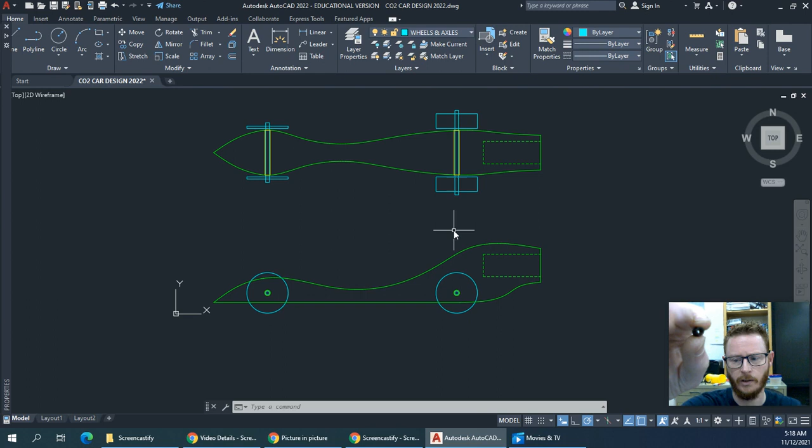I don't know how well you can see it in the camera. I'll try to get a little closer. It's just a black bushing, maybe a little blurry there, but we're going to draw a representation of this. Actually, the little straw things, these sleeves that we've drawn on here, they work well. But if you want to use these bushings, I think they work well also, and I'll explain why I think they work a little bit better. So let's draw this up.

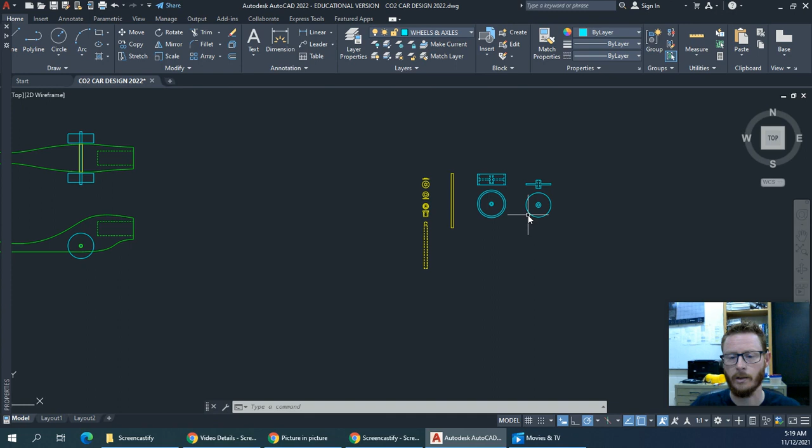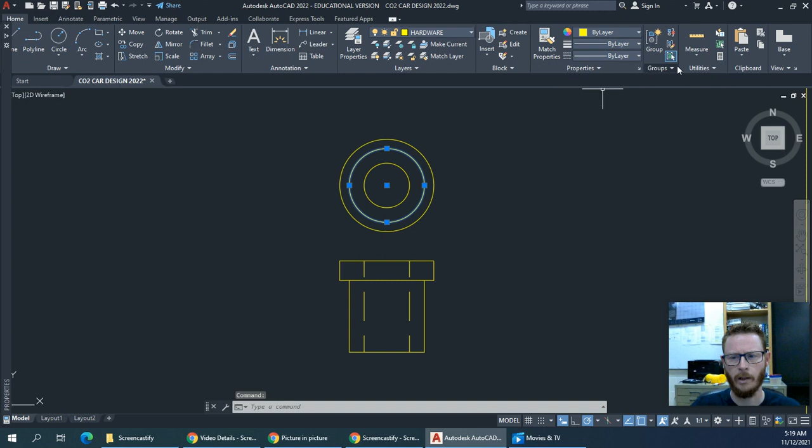And I actually took the time to kind of measure these out and get some sizes of things. So I've actually sort of pre-drawn some of this. So I'm going to walk you through how to draw this yourself. Okay. So let me zoom in. Okay, sorry, I'll fix some of my other stuff later. All right, so this is it. So I'm representing it in two different views. So a top view would be something like this, and then this would be the side view of this sort of a bushing. And I'm going to select this. So I'm going to show you how to draw this. I'm just fixing it here real quick. Okay.

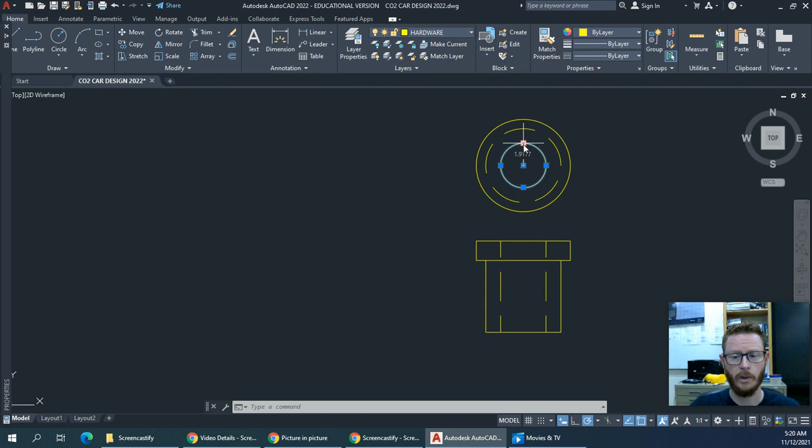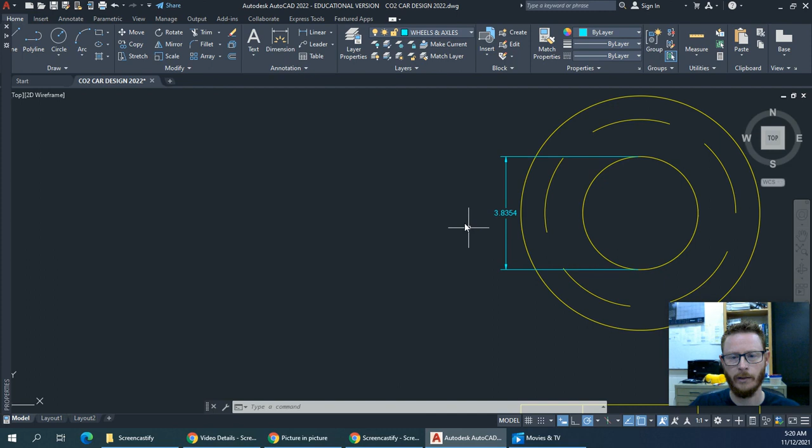Okay, so here's the sizes and how you're going to draw this. All right, so I'll probably have to check sizes as I go along here. So this is the hole that goes all the way through this thing. So we'll start here with this circle. It's going to be 1.9177. Okay, so C for circle, space bar, and I'll just click here to start this. 1.9. I've already forgotten what I just said. So I probably better give myself some help here. All right. So you do not have to draw that. That is to help me remember what size things are.

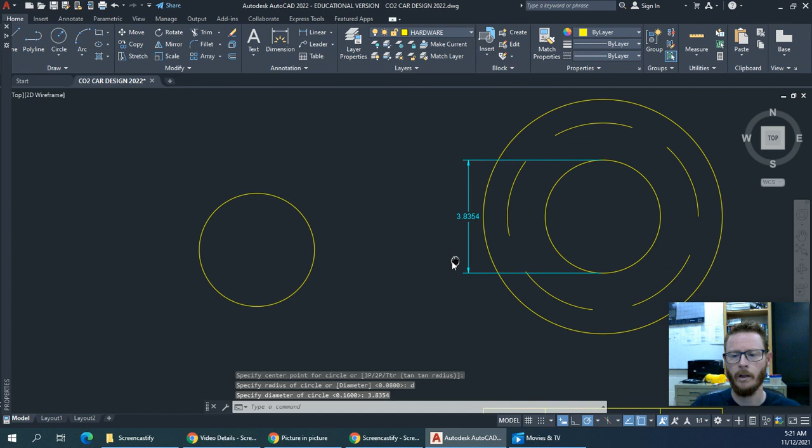I'm actually going to switch. I'm on the wrong layer. I want to do this on the hardware layer. All right, now we're going to start this again. C for circle, space bar. I'll click here. D for diameter. And I'll put in this here. So 3.8354. Yeah. All right. And let me check the size of this larger one. Okay, so C for circle. Same center point, click there. D, enter for diameter.

This one is 7.9502. I used a measuring caliper device thingy to measure these things. Okay, so that's why it's some odd seeming dimensions here. So it's about 8 millimeters really, but 7.9502. All right. And then there's actually another circle here. And sorry, C for circle, C and space bar, same center point. And I just realized I don't know how far that is. So D, L, I, here we go.

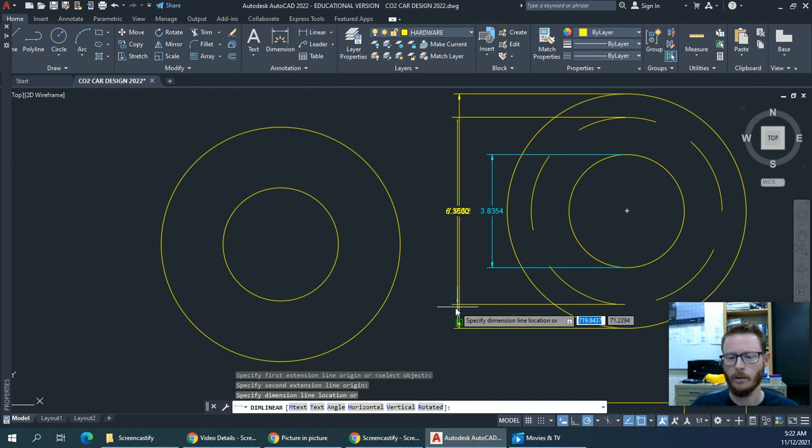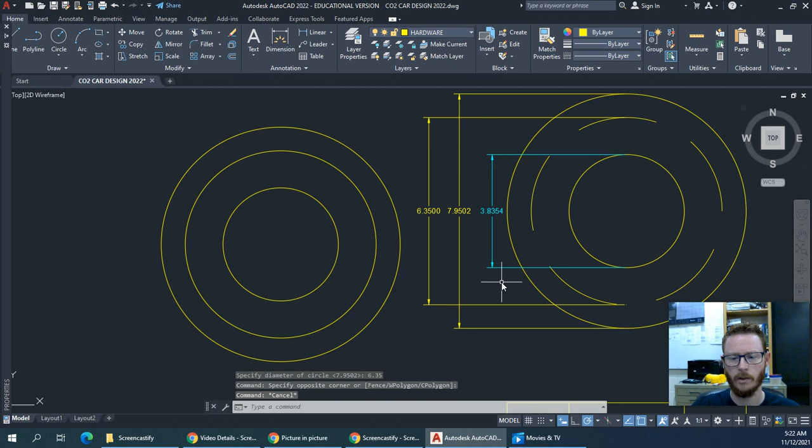All right, so this sort of medium sized circle is going to be a different size. C for circle, click here, D for diameter. This one is 6.35 millimeters. I'm going to delete these here. I'll leave it there for just a moment if you need those sizes, but I'll go ahead and get rid of that. All right. So this is what you should have drawn.

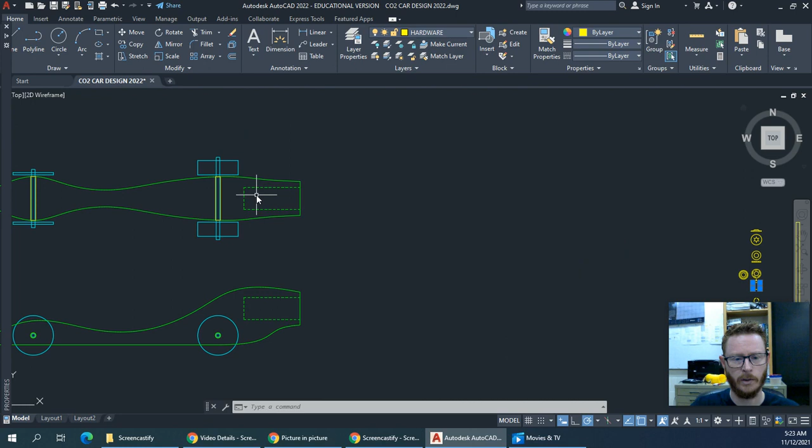Now I show this as a hidden line because if I was looking at this shape, and this is the other view, like the top view. So if I was looking at it, I'm standing here and I was looking at this face of it right there, I would not be able to see this back here. Like I can't see through this part and see that, but I can show it graphically that it's back there with hidden lines. And I do not know if I covered this much in other videos. Looks like I have talked about hidden lines a little bit probably.

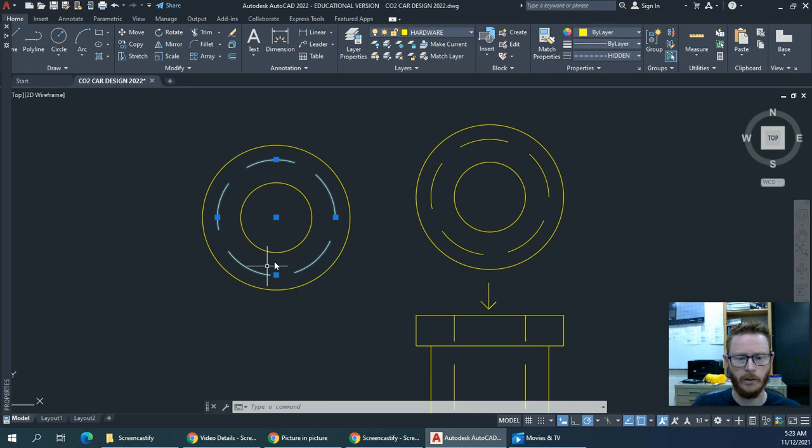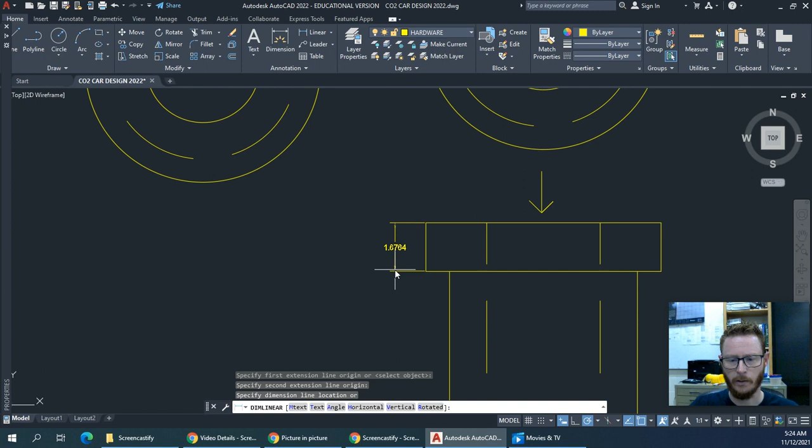So you should have this loaded in. So I'll select this, and you'll do this too. Select that, and properties panel here on the home tab. This drop down, and I've got the hidden layer there. It just shows it as a dashed line, and I'll hit escape to deselect that. All right, so that is the front or side view, I guess. So we'll do this sort of top view. So I'll need a couple of dimensions again here, so bear with me for a moment. Let me get this and this. Okay, that should be all I need. I just have to be able to read it.

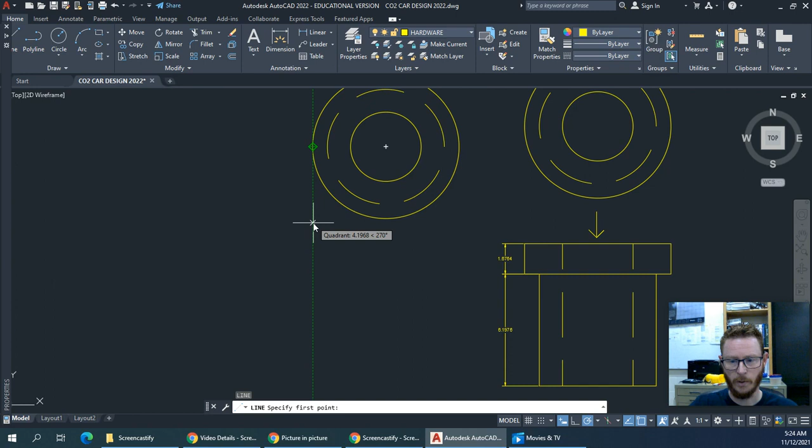Okay, I think I can read it. Some of those 6s look like 8s when I back out too far. All right, so L for line. I'm going to use some of this to draw this next part. Remember, that's orthographic projection. So I'll hover over this quadrant and aim it down, and I'm going to just start it here somewhere. And I know how far over it goes because it's going to be the same as this. I'll hover over that and bring it down and click.

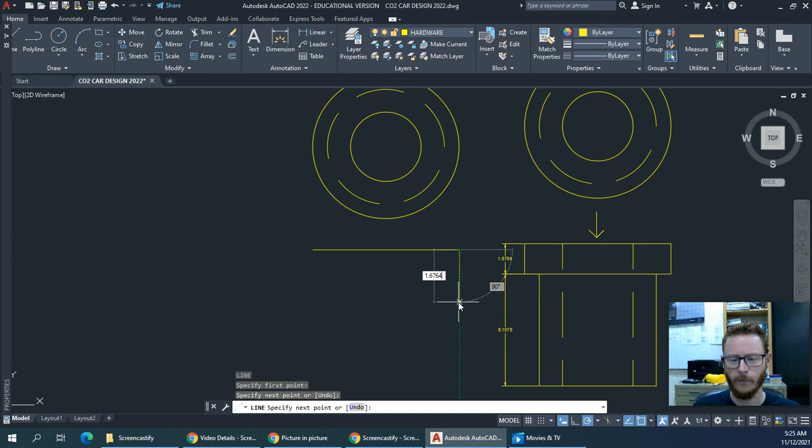And then I'm going to go down, what does that say? 1.6764, I think. Yeah, 1.6764, and enter. And I'll go back this way. I'll hover over this for a moment, then come down and click. And then I'll close this by clicking there, and I'll hit spacebar to end that line command. So we've got this sort of rectangle here, and then we're going to do this next part here.

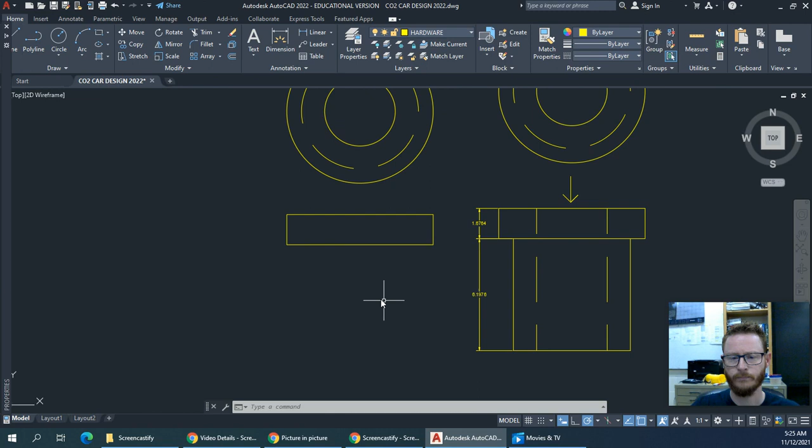All right, so L, enter, and I'll hover over the quadrant of this sort of middle medium size circle, and then bring it down to here, and click. And I'm going to go down 6.1976. I'll hover over this quadrant of that medium circle and then bring it down, click there, and then back up to here, click there, and I'll hit enter. Enter again to restart the line command.

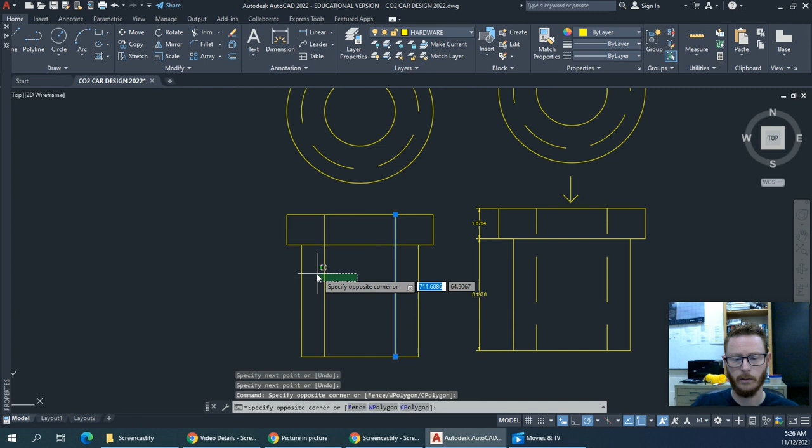We'll hover over that quadrant and bring it down. I'll click here and then here because this goes all the way through the bushing. This is the hole that goes all the way through that I'm representing. So I'll click there, spacebar, and spacebar, hover over this, click, click, and spacebar to end the command. And then I will select these two, and they will be hidden lines because they are happening inside this part. From the top view, I can't see the hole that goes through, but I can represent it graphically here like that. So you should have something that looks like this.

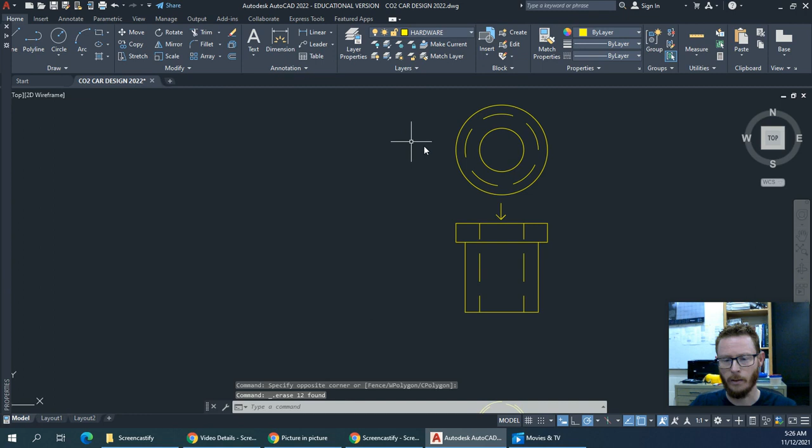So I'm going to actually delete mine because I don't need 2 of them. All right, so you've got this. Now, if you start trying to move this into place, rotate it, copy it, it gets to be a pain if you have to select all the little pieces and parts of every little thing. So we're going to turn this into a block. This will be really helpful if you do this and you save it and we use it next year. If you do another car, you'll have these blocks already drawn up.

So this is actually the first time I'm drawing up, well, it's not the first time. I'm going to save these blocks so I don't have to redraw them myself. All right, so here's how you do that. I'm going to go ahead and pre-select this right here, all of that, and I'll hit escape. I don't know if I mentioned this, but I click, I let go, and I get that selection box. Okay, I think between now and the previous video, I was using a different version of AutoCAD. I'm now using the newest one, the 2022 AutoCAD.

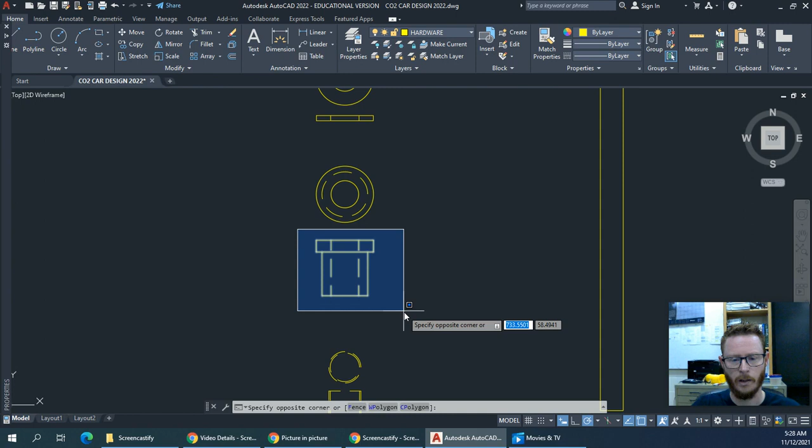So, all right, I'm going to select all of that. And then there's two different commands. I like to use this one, WB. So that's W block, WB for block, and then I'll hit enter. All right, and so I want the source of this block to be objects, okay? If this doesn't all make perfect sense, just hang on. Hopefully it will. Base point, that's important, okay? I'm gonna click here, and that way it'll let me choose where my base point will be.

So when I'm picking this, I'm thinking of, if I bring this in, I'm gonna place it somewhere. Where's the handle need to be? Where do I need to grab this thing so that I can place it where I want it? And right here would probably be the best place. And we'll see this here in a moment. So I'll click that midpoint. All right, objects, select objects. When I pre-selected it, it's already selected. So there's 9 objects selected.

So we're going to convert to block. All right, so make sure that is selected. And I'm going to save this. It's going to be its own individual AutoCAD file. And so I'm going to click the little 3-dot button here. I actually have a folder called CAD blocks, and I've got a few things saved in here. And then I'll call it CO2, turn on my caps lock, CO2 car. I'm going to call it bushing top.

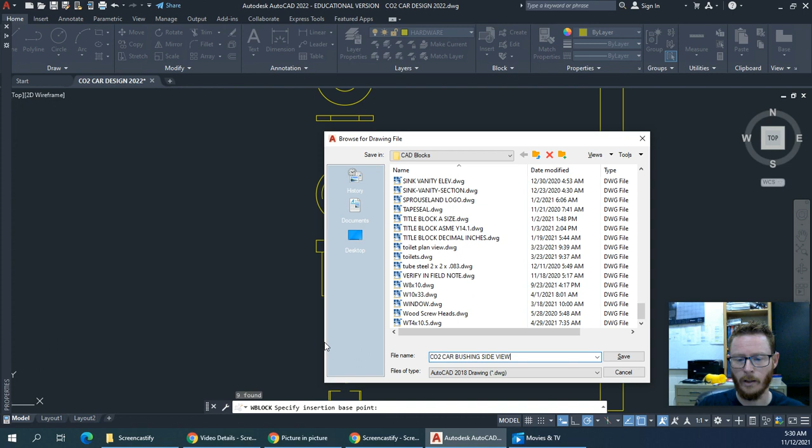This is more of a side view. Something like that. All right, CO2 car bushing side view. Even though it's going to be a top view for us, just thinking in terms of just the bushing, it's more of a side view. So that's probably confusing, but that's okay. All right, I'll click OK once I've done that.

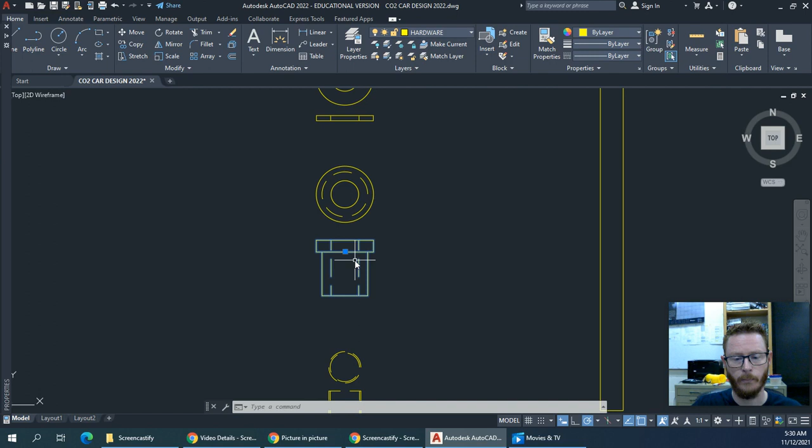And nothing happens. That's great, right? Something did happen. It's just hard to see right now. So if I hover over this, you see how the whole thing starts glowing. I can click it and it's all one thing. It's all one block. It's all grouped together. And then there's this blue grip point. I can actually select that and I can move it. And so I can move it all as one thing.

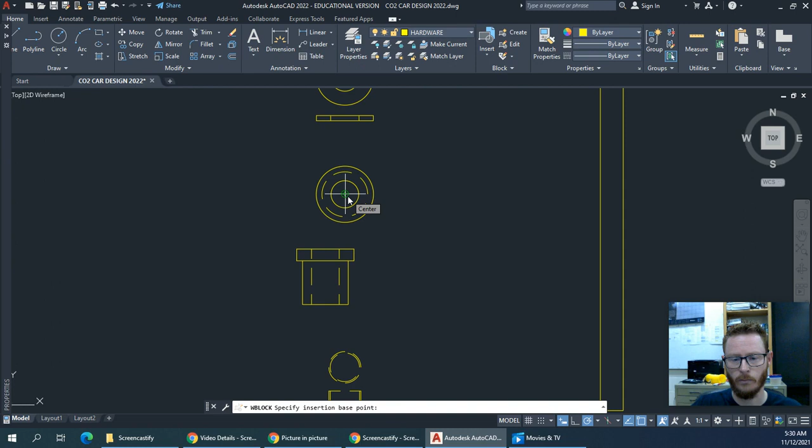I'll hit escape here. We're going to do that again for this here. So WB. And so source, objects, pick point, I'll click this. And then the center of this will be my insertion point. And then I did not pre-select this time. So I'm going to select it, click this button, and then I'll pick all of this. I'll hit space bar.

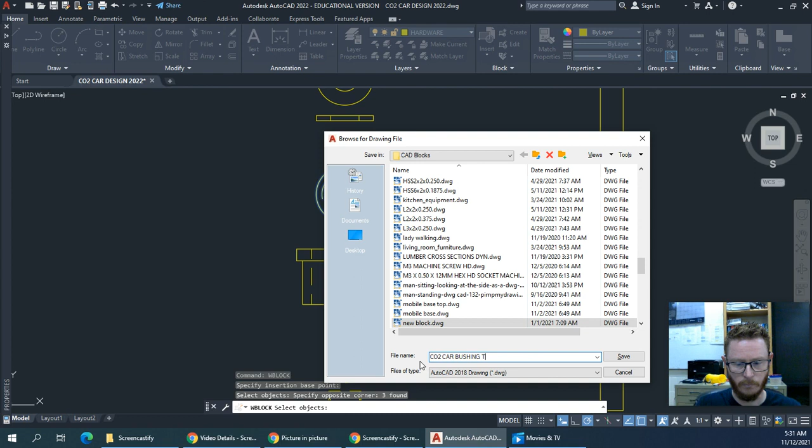3 objects selected, and I'm going to save this. And this one I'm going to call CO2 car bushing. I'll call it top view. And then OK. All right. So now these are sort of individual blocks that I can use. I'm going to hit escape to deselect that. So I'll show you how this works.

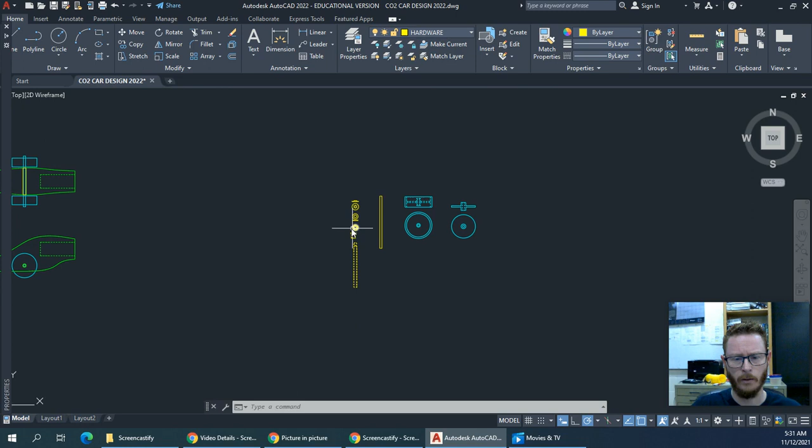I'm going to leave these here and come back over here to our car because I was out to the side drawing all this. So let's say we want to show this here on our top view. So I'm going to kind of zoom in. I'll hit I for insert, I, and enter.

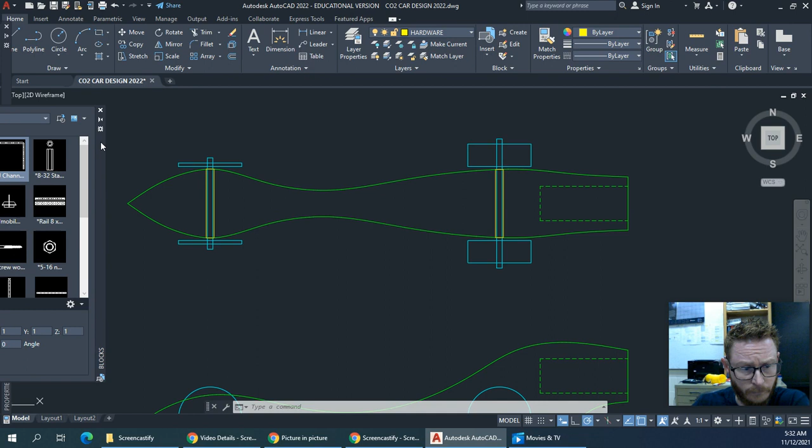And my face is kind of in the way. Let me move this. All right, I'm going to put it over here. You can move this around. I think I'll put it on the side. I get closer to the side. There it goes. When it does that, I can let go, and it docks it there on the side. I'm going to close this. All right, sort of docks it there. And I can click this little auto hide button, and that makes it go away until I hover over it.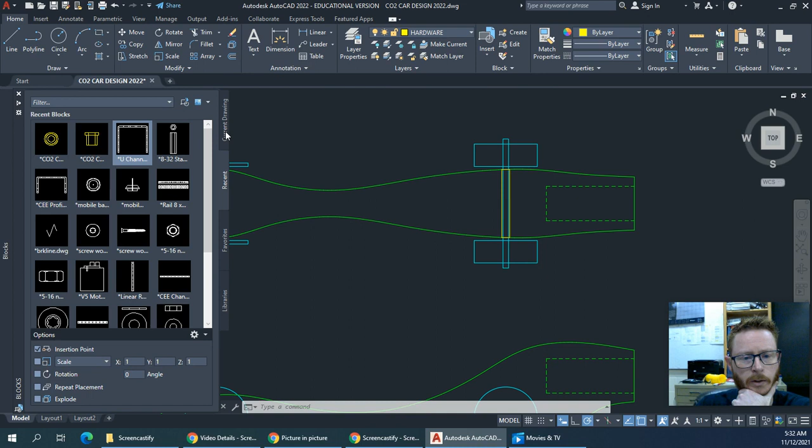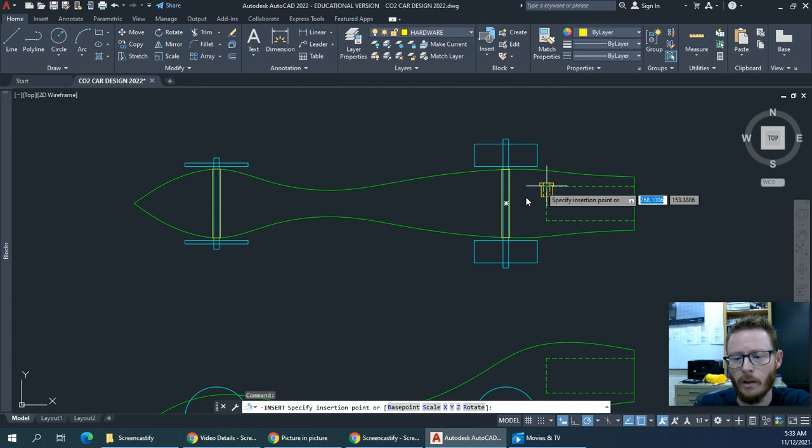All right. So there's tabs here. There's current drawing, recent, favorites, libraries. If I click on current drawing, they should show up. I've got a few others I've done here recently, but let's just do current drawing tab. And I'm going to do this one, the one here for top view. If I click on that just once, you can see I can bring this in just as a whole part. So I can zoom in here.

So where would this go? Well, we would drill a hole through the body of this car, and then we'd be able to put this bushing in that hole. Okay, so it would go right here. So the green line represents the car body, right? And it's not perfectly flat on mine. Okay, so it's going to be something like this. The flange of this bushing might sort of press into the side of the car just a little bit. So it's not going to be perfect here.

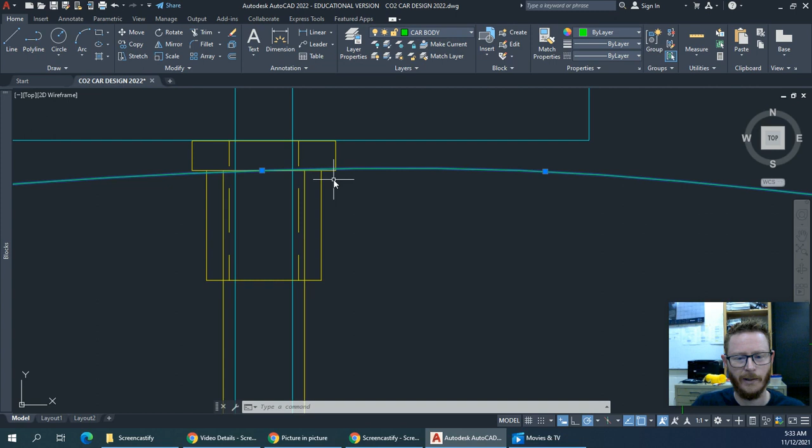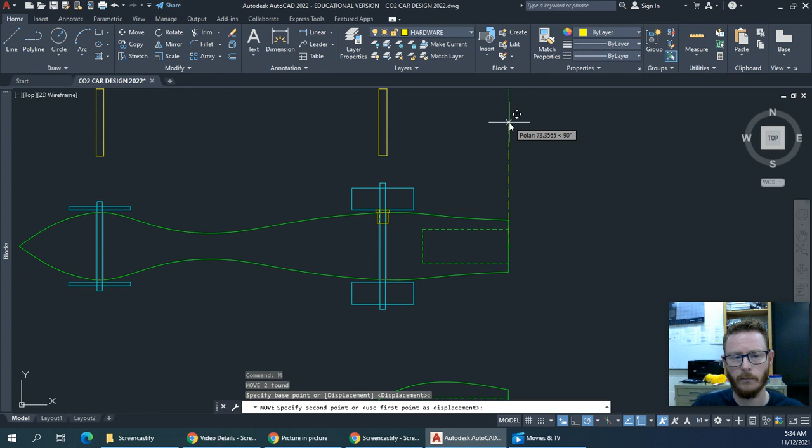But this does show me that I'm going to need a hole that's bigger than what I had planned for originally. I'm actually going to select these two yellow rectangles, and I'm going to move, M for move, spacebar, and I'll click some point. This one is fine. I'm going to move it up because I'm trying to decide right now, do I want to use this or the bushing? I'm not going to use both. I would use one or the other, the sort of straw, sort of sleeve, or this bushing.

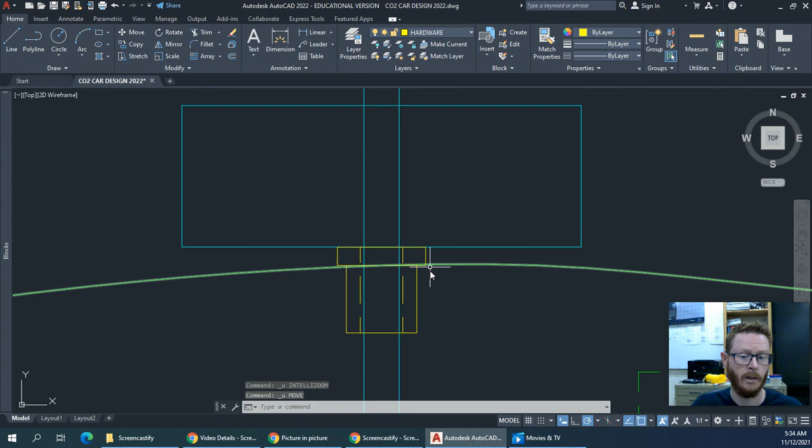And the reason I like these black bushings better myself is it's actually a tighter fit. So this is the actual size of this axle, these lines here. So this bushing, it's pretty tight. The sleeve, if I temporarily show you this here, it's bigger. There's more room for some play in between axle and sleeve. Let me back up. So that's why I kind of like these better. It also means I drill a little bit of a bigger hole all the way through the body of the car.

How big? Well, depends on how far across this is. I'm going to use my distance command, DI, enter, click here and here, and it tells me that it's 6.35 millimeters across. Now, I can tell you that this is going to mean you're going to want to use a 1/4 inch drill bit, okay? That will work well for this. So let's draw this.

I'll show you this. I'm going to come out here to the side and do this. A rectangle. Let me switch my layers. I'm going to put it on car body layer. All right, we'll draw a rectangle. REC spacebar, and I'll click here just anywhere outside of my car. And it's going to be sort of 1/4 inch drill bit. So the diameter would be 0.25. So I'm going to put 0.25 there, and then I'll hit comma. And for the length, right now, I'm just going to put 3. I'm going to change it here in a minute.

And it makes something that's really small, I have to zoom in to see it. I drew it in inches because the drill bits I use are normally in inches. So I have this drawn in inches, but I've been working in millimeters. So what do we do about that?

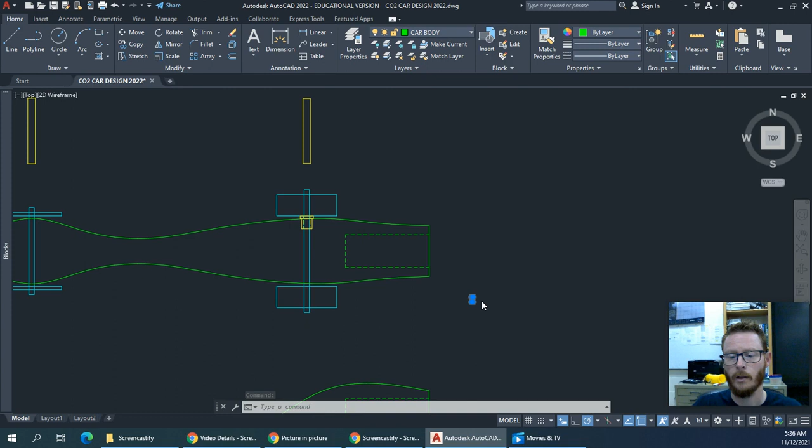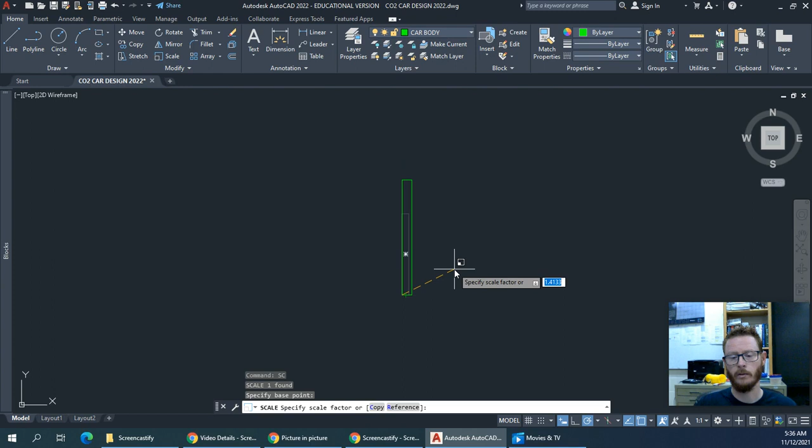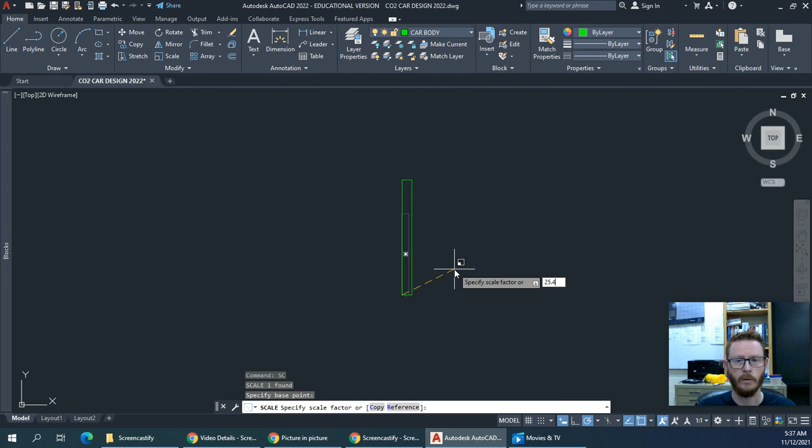I could go ask Google how many millimeters are in an inch, or I could just take this that I've drawn in inches, select it, SC for scale, hit spacebar, and pick a base point — bottom left corner is fine. Then it wants a scale factor. If you're going from inches to millimeters, there are 25.4 millimeters in 1 inch, I think. That's the scale factor, 25.4. I'll zoom out here.

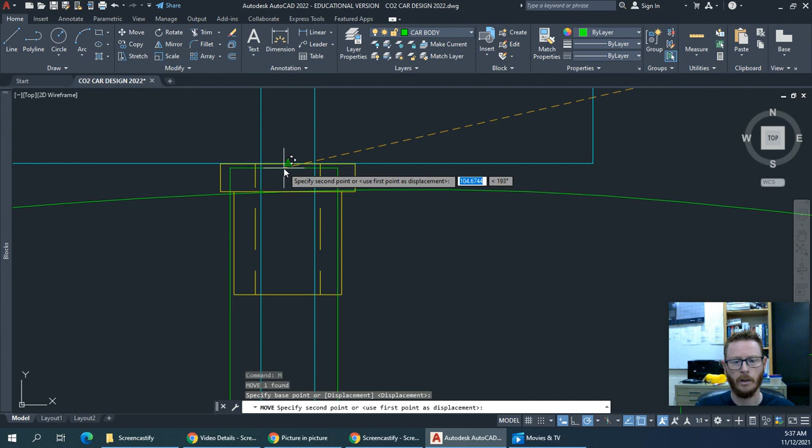All right, so this should be the proper size. I'm going to move it. I'll go ahead and pre-select it, M and spacebar. I'll get the center, the midpoint here, and move it from there. I'm going to put it on the midpoint of where this bushing is, and you can see it lines up.

Okay, so that 1/4 inch drill bit is going to work really well for what we're doing. So we'd actually drill a hole all the way through the body of the car, and here's how we're going to show that.

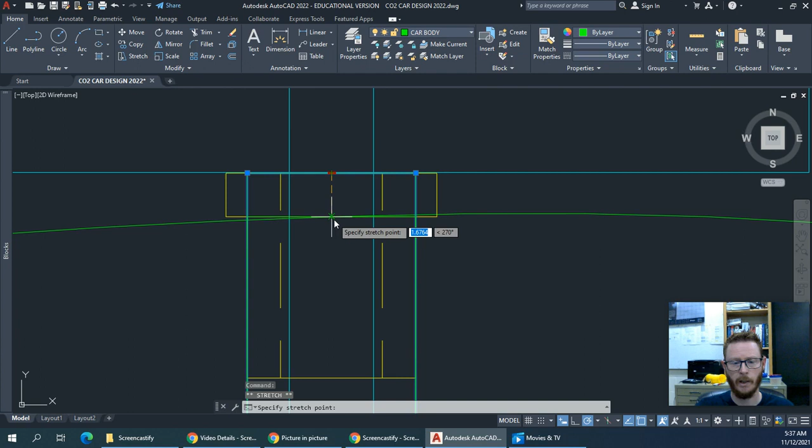So I've got this rectangle selected, and there's these little blue rectangles right there. If I click on that, I can stretch this back. I can do the same here, stretching it back to the body of the car. And I want to turn it into a hidden line, so I'll hit escape.

So I want to show a hidden line because, again, this is a hole that goes through the car. I can't see it from the top view, I can't see through the wood, but this shows me that this is going to be a hole that goes all the way through. So I need one of these bushings on the other side of the car.

So if I select this, MI for mirror, and I can pick this midpoint, aim it to the left, click and enter. Now I have those bushings on both sides, and you can glue these bushings to the wood of the car so they stay in.

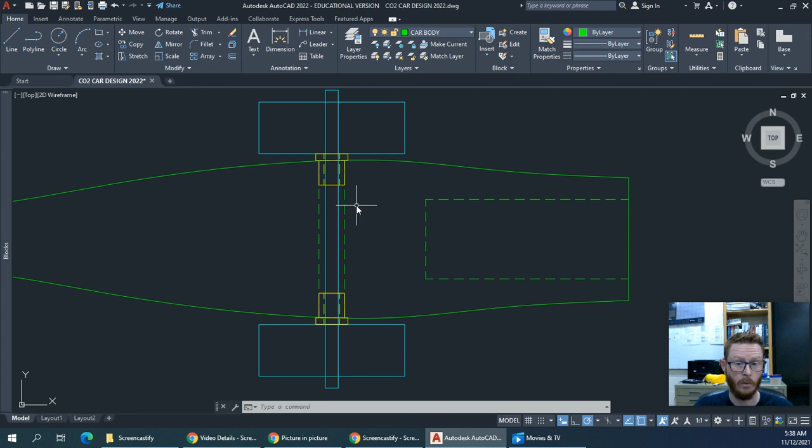Okay, so if it's not real tight, which it won't be, you'd add just a little bit of probably wood glue or super glue or something like that, and you'd be gluing the outside of this bushing to the inside of the hole there that we drill through.

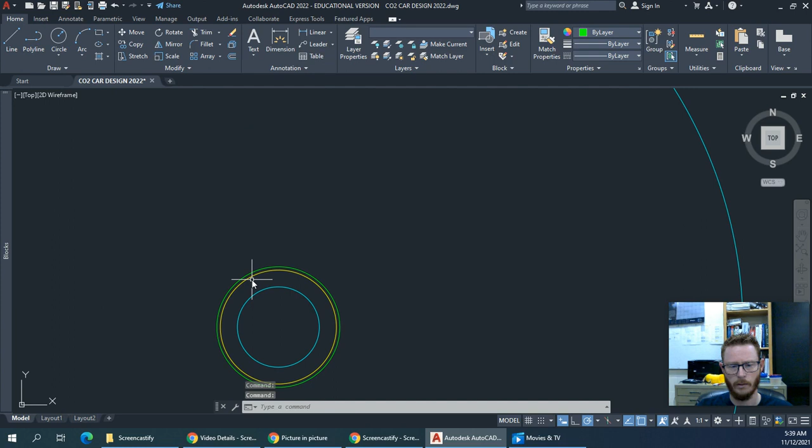So what would this look like then in this view? All right, let's do this. I'm going to move — let me select the yellow and green, the green M and spacebar, and I'll click anywhere right here and just move these down out of the way. We're kind of starting fresh because I'm thinking I want to use these bushings instead of these sleeves we talked about.

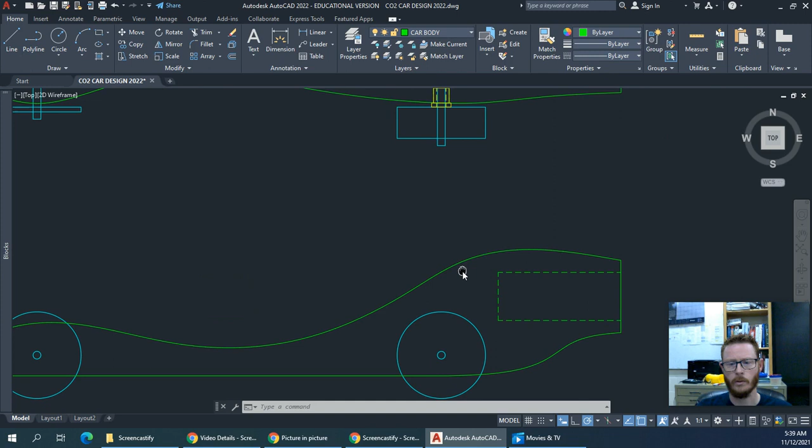All right, so let's go ahead and draw the circle for the hole that we're going to drill through the body of the car. I'm on the car body layer, C for circle, wherever the center of my wheel and axle and all that is, D for diameter, and it's 6.35 if I'm remembering right. Okay, so that would be the size of the hole that I drill all the way through this car.

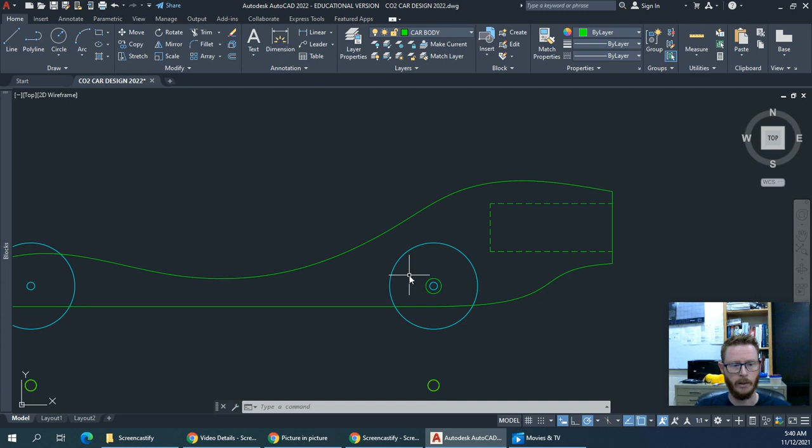Now I want to add the bushings, so I can hit I for insert, I and spacebar, and then click here. This is the other view, right? So I'll put it here, all right? And you can see that it's bigger — there's my green circle in there.

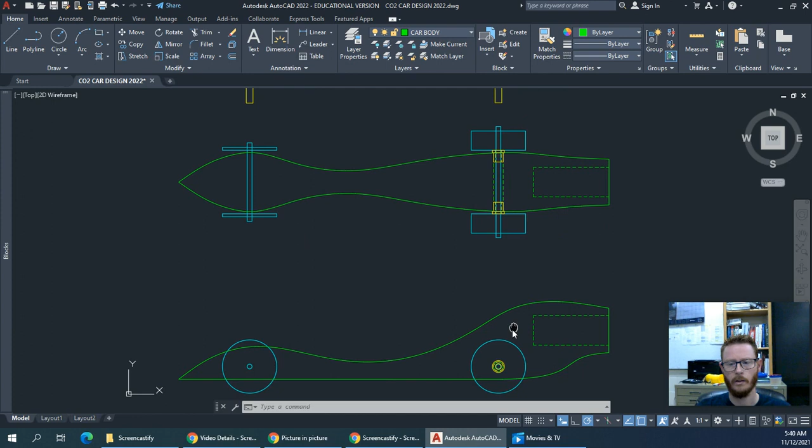This is the outside flange of this bushing, is bigger — you see it here, it sort of steps out, right? And this actually works in our favor by having this sort of step out, this sort of flange here. It gives the wheel something to ride against, and we're actually going to draw a better wheel than this.

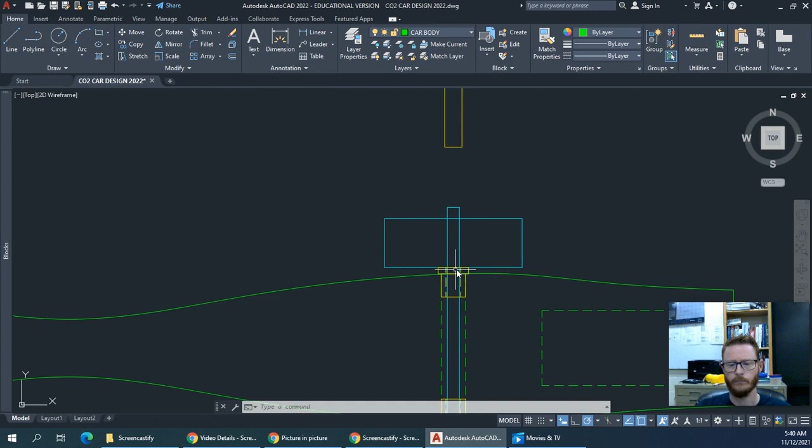All right, so we've got those added, and we've got it added on this view. We're showing the bushing there, and we're showing where the hole would be that we would drill through, and sort of how tightly things would fit here.

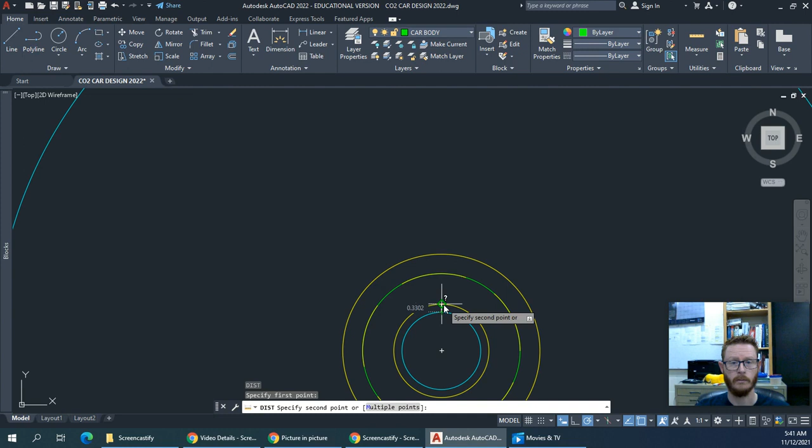So if I'm going to check this here, DI for distance, from here to here — so the sort of play or gap between the axle and the bushing is right there. It's like 1/3 of a millimeter, very, very small. So it should reduce friction a great deal.

Our 3D printer is down, so I cannot 3D print wheels or bushings or anything right now. So we're going to plan on using stock wheels that I have. We'll be drawing that up in the next video.